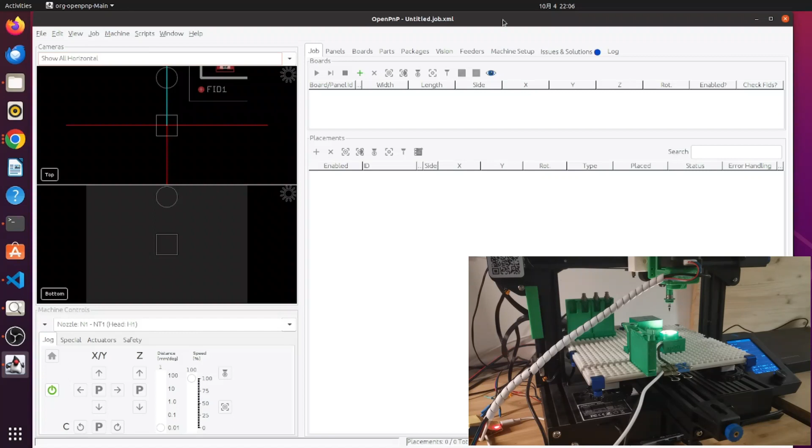Okay, so now let's get started. So as you can see here, this is an OpenPNP empty instance. Usually when you don't have anything set up, you just open OpenPNP and you will see this screen. To set it up, OpenPNP comes with a very handy Issues and Solutions. It's like a wizard, so you can actually use this one to set up your pick and place machine.

So at first, there are types of heads. So for us, it's standalone nozzles. You can also set different types of other nozzles. So basically, you can click on OK, and here it will actually remind you there are some other things, or maybe something you need to be aware of. So in here I just use yes, and then here it's proceed to connect, so it's basically okay. Then basically we set up the first step, which is to select what kind of nozzle head it is.

So now we come to the second step, which is connect. So basically, in this case, we have a top camera and a bottom camera, so we can actually connect the camera, so that it sets the camera not to the simulated one but the real one. And then this driver we can replace with the G-code driver, and then we can do the Issues and Solutions. Then it will ask you to choose the communication ports. That's also straightforward. You just go here, driver, and then you can go here.

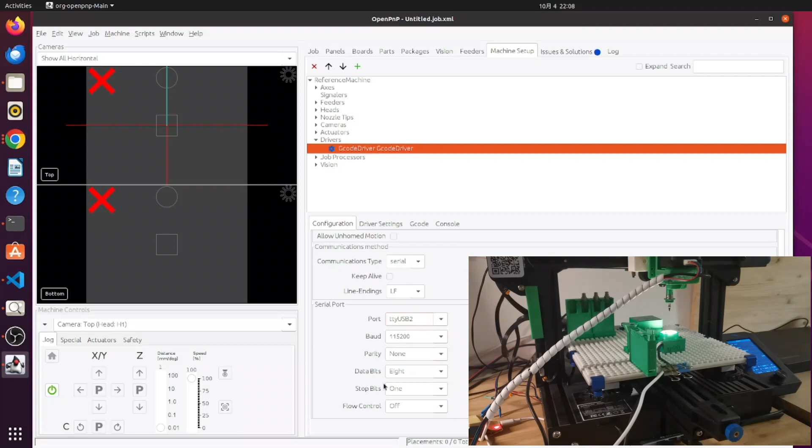And for me, I know that the driver here uses serial, and the port is USB. Actually, because I'm building in the actuator for light, I use ttyUSB2. So this one I know by myself, it's the USB. So with this, you can say apply. With that, you already set up the communication channel to the G-code, and then you can say Issues and Solutions. Then it's gone.

Now firmware is not detected, so basically we want to detect the firmware. Then we say okay. Then okay, this one is also detected. Then there will be more information. And here, after it detects, it says okay, it has ABC, but there's no support for rotation ABC axis, but that's okay because we are using the 3D printer. It comes with the extruder axis E. We can use that. So this one is fine. We can dismiss that.

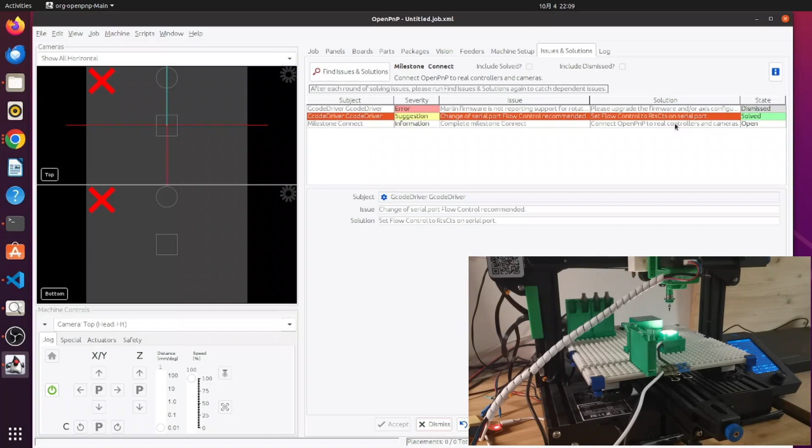And then after that, you have the G-code, change flow control. Okay, so we usually follow the suggestion here. Then the milestone connect, I just say okay, now the milestone connect is good. So then we basically go to basic. The connection is already done, and now it says axis letter is missing, so this one we just use X, that's fine. And these are the Y and also the Z, that's good.

And then C, here it's not sure, so we know it actually detects this E axis, and we know that it's the extruder, and we also know that we connected the extruder into here, into this nozzle head, so that's fine. We know it's it, so we can select accept. Now it's good. And then the pump.

Pump is actually used to make sure the nozzle head can attach the components. So what we can do here is use the fan control. Usually the fan control comes with the M106 command. S255 means turn on at maximum, and then this will work. We also need to set the turn off, which is M107. With that, we're able to control the operation of the pump, because 3D printers usually come with control of a fan. So this is good as well.

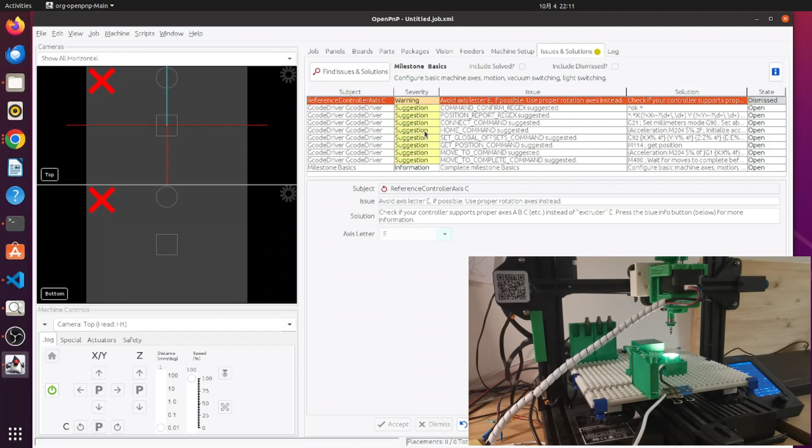So this is how it was. Then we can select the find issue solution. This one again asks you to use axis C, and we know that it's an E, so we dismiss. Now it's suggesting some commands. We just do the setting here, connect, which is also good.

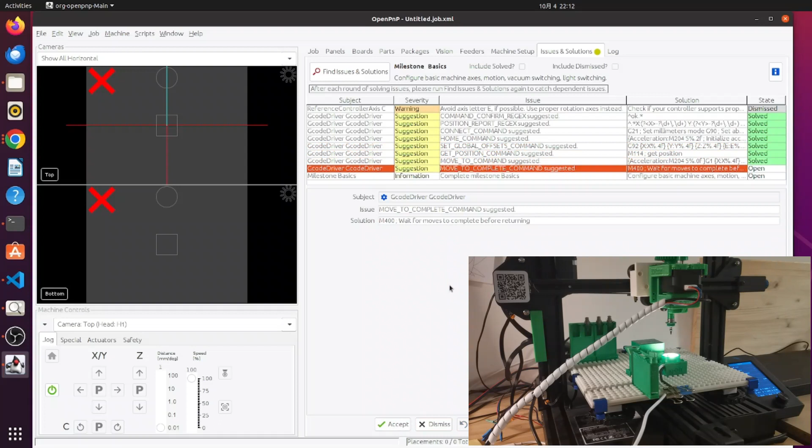We need to customize a little bit here. Global offset, that's also fine, we just select that and accept. Complete. So with this, now you can see it's actually able to connect.

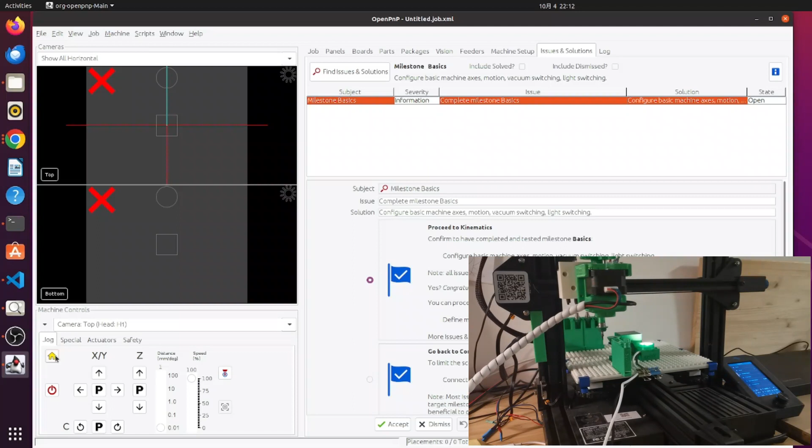But we still need to customize the home command. Let's just do connect. You will see it actually connects to the machine, and you can see it's homing pretty fast, and that is also not so good. If it's too fast, then when it moves to the end stop, it will actually have a little bit of force hitting the stop. Therefore, we need to customize the home command as well.

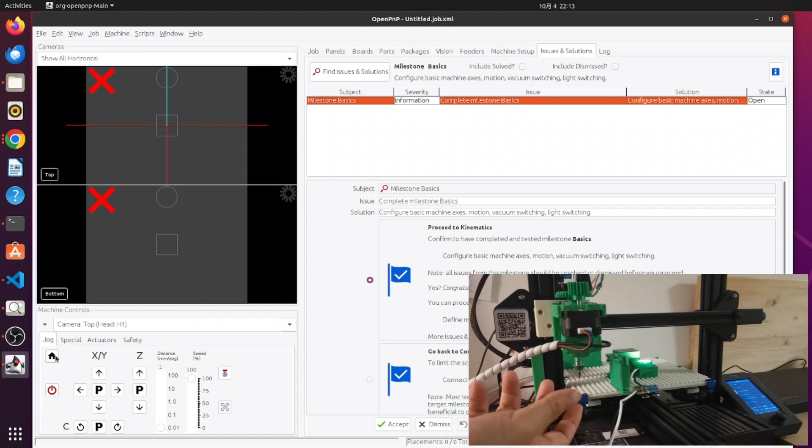There is another thing for the E-axis to move. This 3D printer comes with protection that when temperature is low, it doesn't allow the extruder to run, which makes sense for a 3D printer. So now we need to also remove this limitation so that this axis can move. If you see now, if I'm doing this one command, it doesn't work.

Okay, so now to customize the home command, what we can do is go to the G code, and then we have the home command here. As you can see, this is the go-to-home command. So what we can do is M203. This one sets the feed rate of the axis. So we say X20, Y20, and Z is 10. We also make a comment saying limit feed rate. This is basically to make sure that we are homing not too fast.

After that, we need to set the extruder, the cold extruder. There is a command, M302, and you can see the flag, which is P0, so it enables the cold extrusion checking, and it also specifies the temperature. We can set it to a lower temperature, lower than room temperature, then it should work. So the format is M302, P0, and we can say 5. That means above 5 degrees we allow the axis to move.

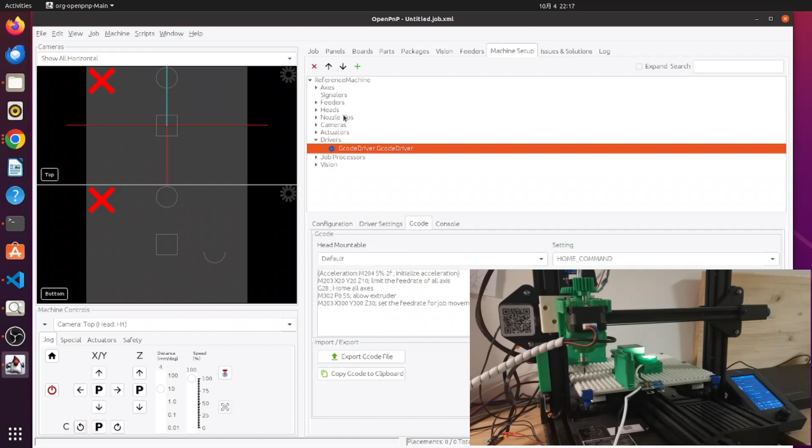Previously without this command, we're not able to turn the axis, the extruder. So now if we do this... I think the setting is good. So what we need to do is I can do another homing.

This has always been misleading, because here we got a camera top which is not really on the axis. So in this one you will see, so now if I do this, you can see the axis is actually moving. But right now the mapping, the rotation, is not correct.

If you say 10, here it's actually not 10. So what we need to do is calibrate this axis to make sure that when we set turn 10, it actually turns 10 degrees. So what we are going to do is create an axis - this is a reference mapped axis - and input axis we say rotation and input is C.

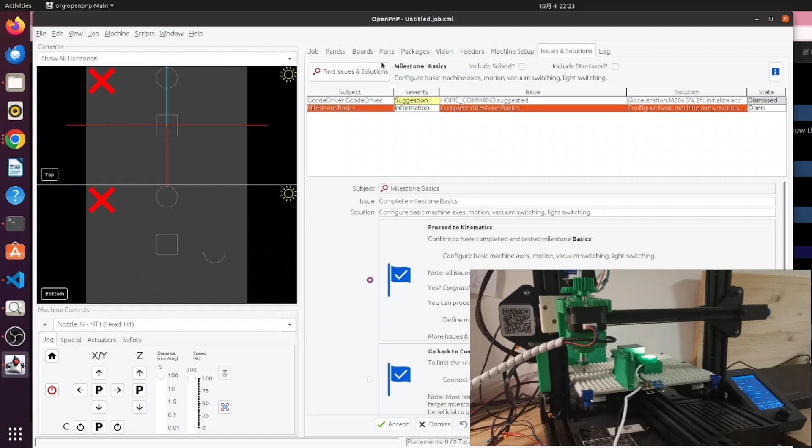So this is the mapping, and now we need to see here the home command. It says home command suggested, but here we already customized the home command, so we accept this one, then we say dismiss, and this milestone is good, so we say accept.

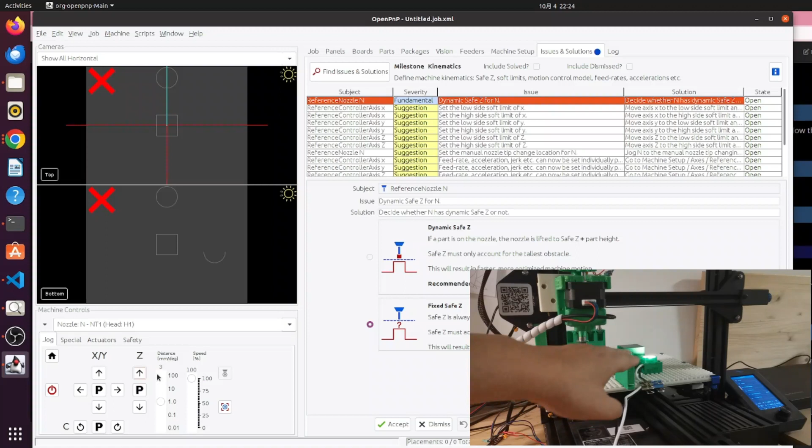So now it's for the dynamic safe Z for the nozzle. For me, I know that my Z I usually use 27, so that it's able to move over all the components and also leave some space. That's what I usually use. So I'm just set it to 27, and then I say accept the fixed safe Z. So then I have a fixed height. This is good now.

For you, if you want to use some other, you can also use dynamic, but I just use fixed safe Z to be easier. Okay, so now we also need to set the lower soft limit and high soft limit, so that this ensures your machine is not over the limit of X. For me, I know this machine is from 0 to 220.

So basically, I just go to machine setup. You can also move the axis, move the head to the axis, and then say okay. Maybe I can use here - I have x0, which is accepting, and the y for the high limit I know it's 220 for me, so I just come here and say 220 and apply. And then here, if I do this, you'll see x is gone.

Set the safe Z of N. Okay, so this is, for reference nozzle N, we already at the 27, so we can accept, which is good.

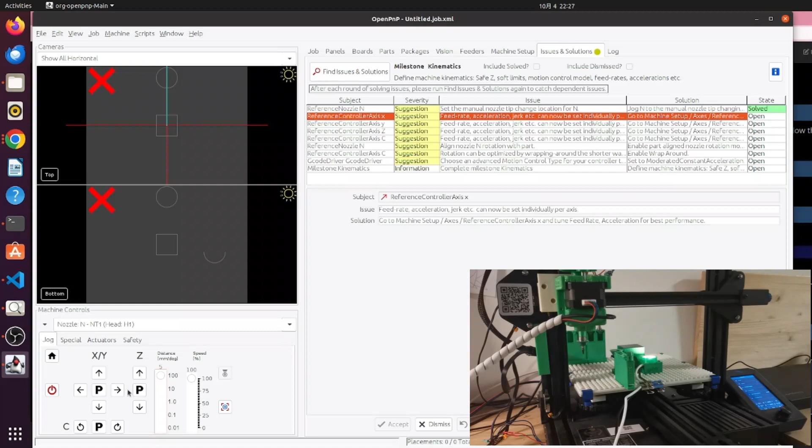And now the feed rate and other settings like jerk, we can actually try that. So here we can give a feed rate. Right now this is very slow, as you can see.

So what I'm going to do is... oh yeah, there's one more thing. I think this slowness is... let me see.

...in a different way, the driver is moving in a different way, therefore it will be slow. So if I try the other one...

Okay, it's still slow. Okay, and rotation. Okay, so I'll just continue with the other one.

Wrapping around, that's good. Choose advanced motion control, okay. This one, and okay, so this one is actually what I was looking at - it's limiting the feed rate.

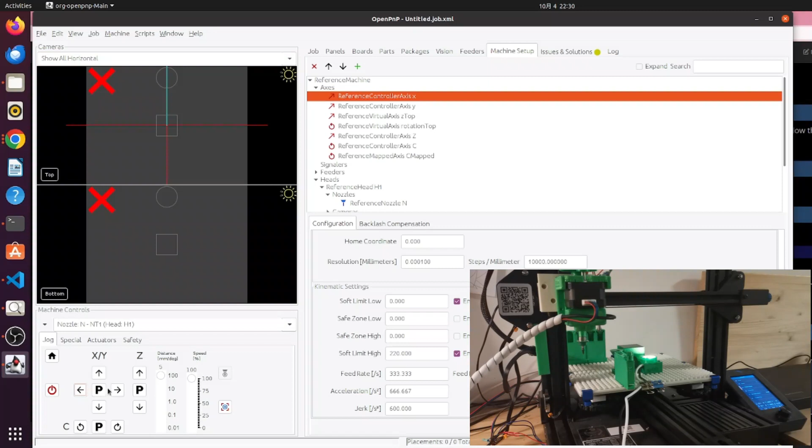So you can see it has a nice start and stop acceleration because of the jerk, which is good. I want to do the same thing for the y-axis, so you can see. Okay, so it's under the limit, so it doesn't allow you.

Now it's good. So we also have the Z axis here. So what happened - you can see.

If the up-down movement doesn't have good acceleration and deceleration, then it will also hit the feeder tape, which is also not good.

So I just set it to... so you can see now it's much smoother at the end.

So you make sure that the nozzle tip doesn't bump into the feeder tape, causing the component to bounce off. These are also things we need to notice.

Okay, so now we've only got those four, and we've already set it. The other thing is then the rotation.

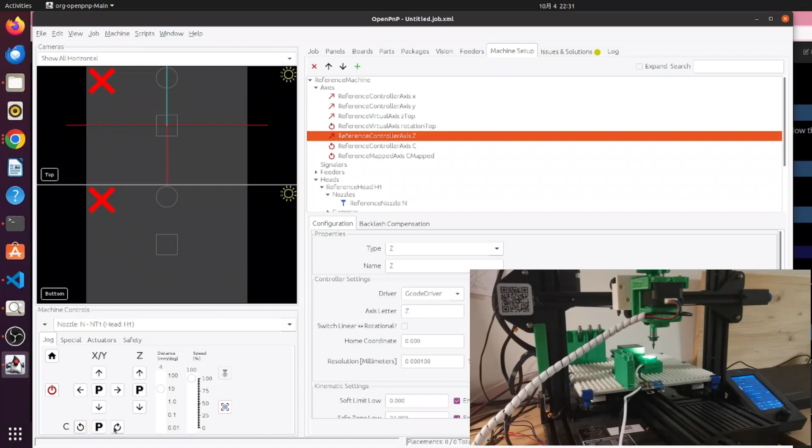What you just see is because we limit the range, then at some point it will turn back. So you'll see this long turn even if we only turn 10 degrees, then it needs to go back. That's why.

Okay, so now I'll try to show you again. So here, 100 degrees, so you see it turning second time, third time, and if we push more, it goes above 360, then it goes back.

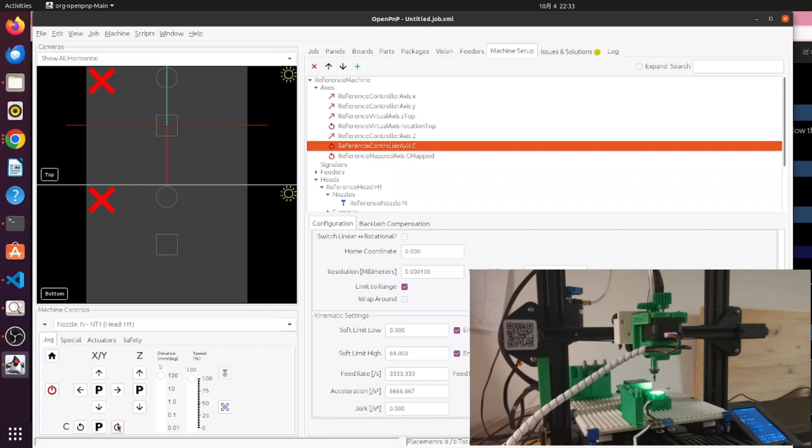So for this, one of the reasons is that there might be, how do you say, it's not 100% accurate.

So when you're always turning one direction, there will be accumulating error. So when I limit the range, it sometimes turns back and forth, and the error cancels out. That's why I'm doing this limit range.

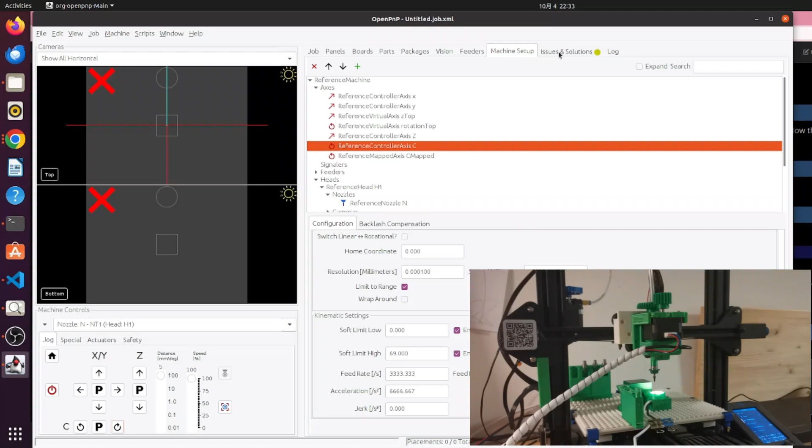Okay, so this part is also done. I just dismiss this one, dismiss this. Okay, so now I can actually go to the next one.

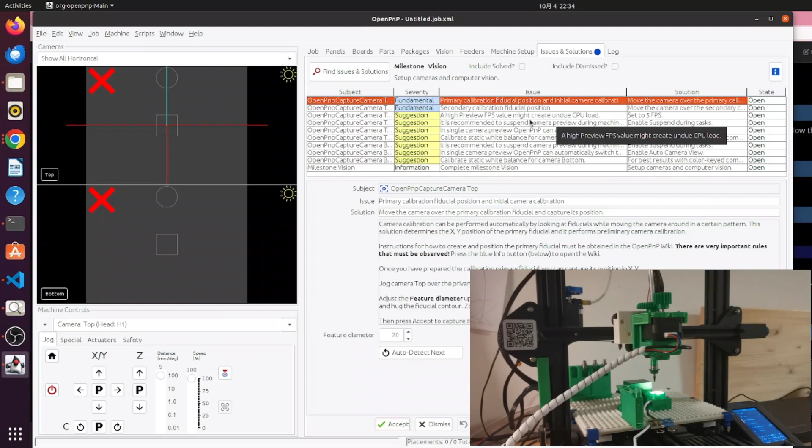So the calibration is actually taking quite some time. Up to this moment we have finished the basic setup of the system. So the next one is the vision, which I will cover in the next video.